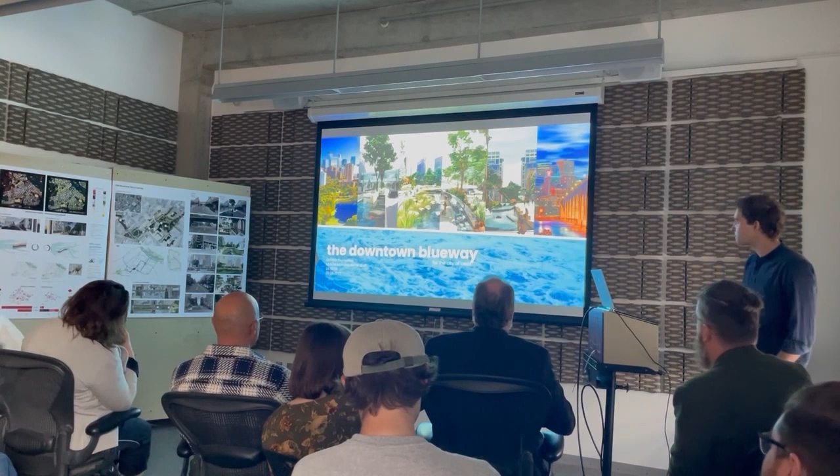I'm happy to close up the day, hopefully keep the energy up after 2 days straight of presentations. My project is called the Downtown Blueway, a master plan for downtown Minneapolis, with the city of Minneapolis as the main client here.

It's proposing a transformation from dead parking to dense urban habitat over the next 30 years. The why is because between post-COVID work patterns, autonomous transportation, and climate change, downtown must transform from a 20th century planning paradigm to one suited for the 21st and beyond.

The strategy I'm employing is to target the worst half of parking for redevelopment, reprioritize pedestrian, cyclist, public transit, and autonomous ridership as the preferred way to get downtown and move downtown. Connect the Grand Rounds through downtown to attract pedestrian-oriented development, and manage water joyfully and responsibly.

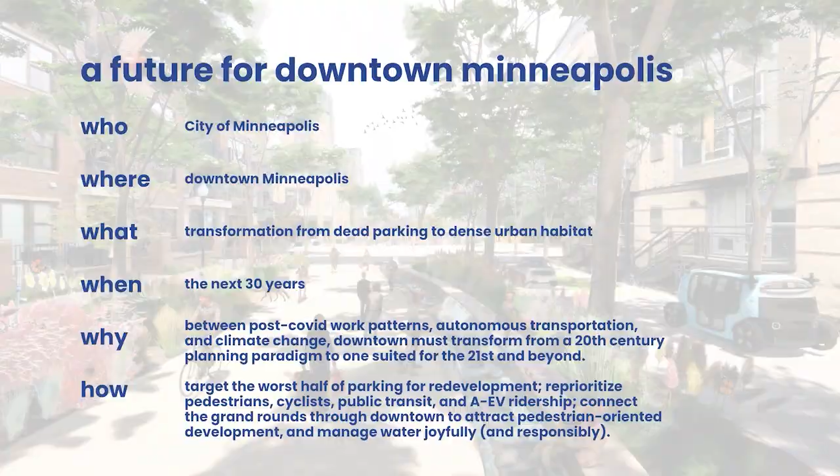Downtown has transformed several times in the past 200 years, going from a powerful place of gathering for the Dakota people, to flour mills and sawmills, an industrial landscape with streetcar lines, then spreading out to sprawl over the city, replaced by shopping and the car, and now offices, which are in crisis.

Just recently, housing has been increasing, and on the horizon we have a new form of transportation that will transform our relationship with parking.

This reiterates the landscape we generated in conjunction with the car. For about 100 years, we did everything we could to make parking as cheap and available as possible everywhere in the city. Despite this strategy, office spaces are now 30% vacant, and the rest remaining are 74% hybrid. We have 50% of the commuters coming into downtown compared to what this was designed for. When business is not in operation, much of downtown is just dead, vacant space.

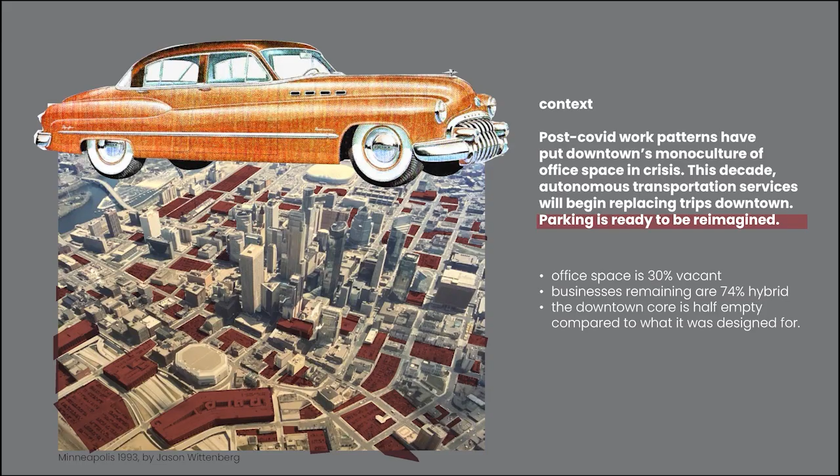This is not the landscape that will come along with autonomous vehicles. I'll get into this in more detail later, but the driving purpose of this project is to reimagine what we can do with this parking space to create vibrant habitat for 21st century life, addressing the challenges of climate adaptation, the housing crisis, and water stewardship.

There's a lesson we can learn from 1883, when the city was first expanding into what's now the rest of Minneapolis. The same year the streetcars were being laid, powered by water, Horace Cleveland urged the city to think 100 years into the future and secure the water bodies around Minneapolis as public land, so it wouldn't just be aimlessly taken up by private development and become someone's backyards.

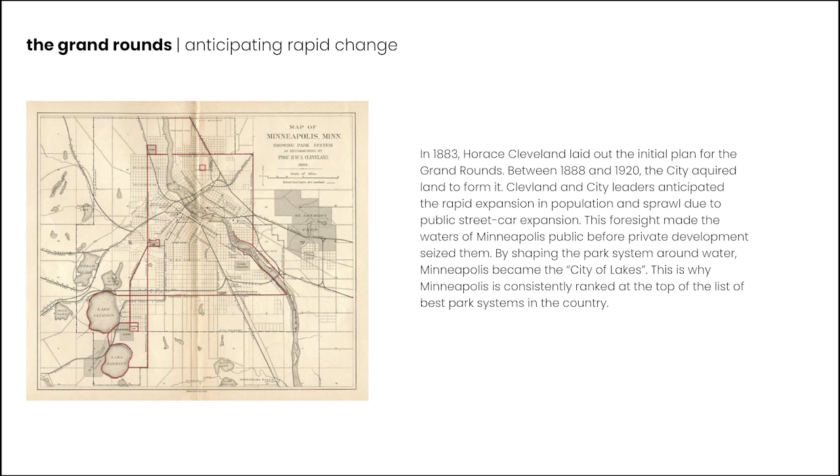This created the foundation of the Grand Rounds, which is very much at the heart of the identity of Minneapolis. We are a city that lives very closely with water, celebrates water, bikes around water, gets on the water, enjoys the water. Much of our recreation is focused on water.

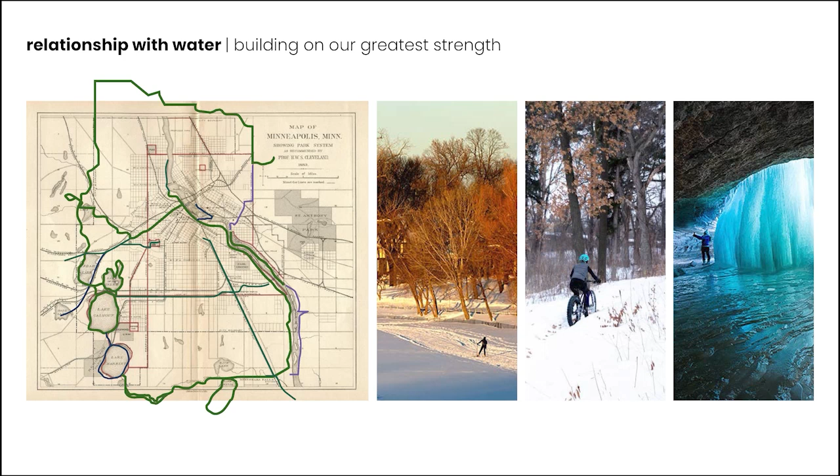This is also true in the winter. You can see people cross-country skiing and fat tire biking on the Grand Rounds year-round. This is really about half the year. It looks like this.

Part of this project is to expand on the best idea we ever had and bring the infrastructure of the Grand Rounds deeper into downtown.

So anyone who lives downtown has the entire regional park system at their doorstep, as well as people coming in from elsewhere in the city. They have a clear way to move on a bike or a scooter or on foot into the heart of downtown, so they don't have to navigate just a bunch of highways full of cars and parking.

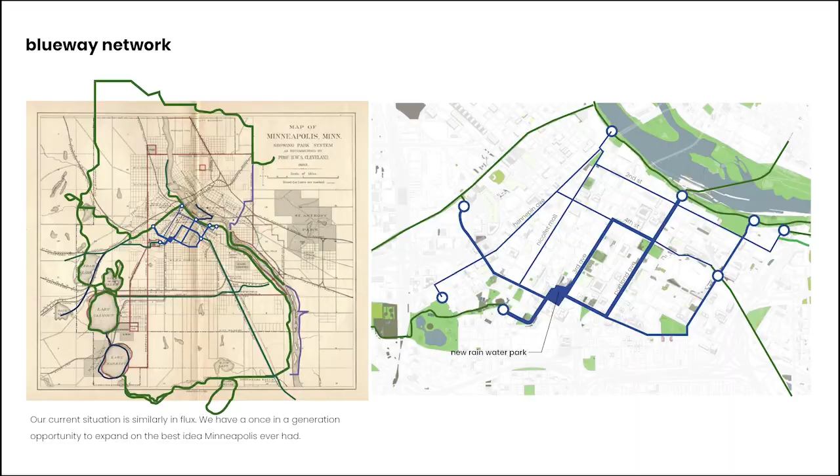On the downtown scale, this is going to link our existing parks, starting from Loring Park, through the Loring Greenway, Convention Center Plaza, Government Plaza, the Commons, and then up right to the Falls and the Stone Arch Bridge. This is the route that later in the presentation I'll walk you through.

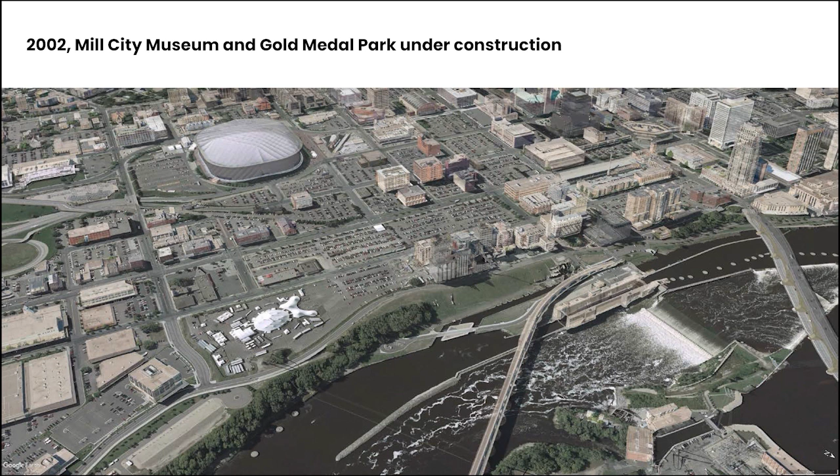The city has recently been moving from parking towards housing. This is just 20 years ago. The riverfront, right by the falls, you would think would be one of the most desirable places to live, was a post-industrial parking wasteland. You can see them beginning to build Gold Medal Park here, and the city signaled an investment in this space.

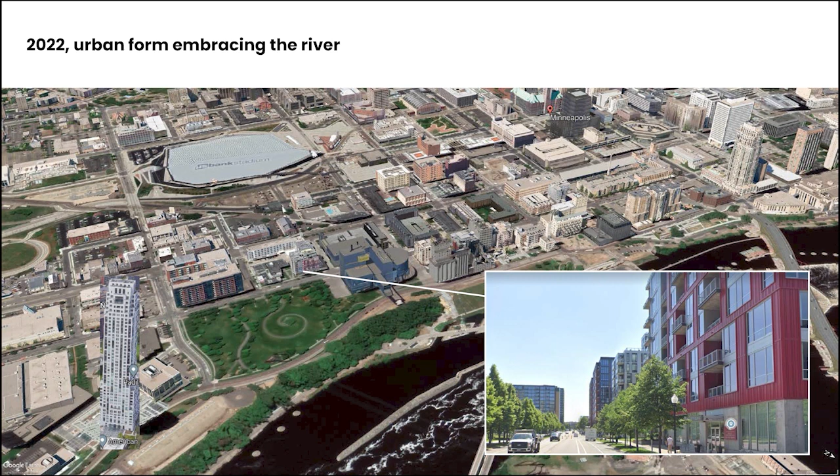20 years later, we have 2 blocks worth of fairly dense housing that is changing the entire meaning of downtown, and it's already becoming a place where people are living. My project is hopefully going to bring some of this energy and the connection to water deeper into downtown, which, as you'll see, is a parking wasteland.

The strategy here is to target the 50% of parking that is the easiest to transform and the most harmful to urban life. If we reduce parking by 50%, we can free up 85% of the surface area of parking, or 19% of downtown. I'll get into that in more detail later.

With that space, we could almost quadruple the housing downtown and become as dense as some of the most livable cities in the world, with 18-hour street activation, plus hopefully 18-hour activation of the Skyway.

Decoupled from parking, housing can be 20% less expensive than it otherwise would be, and we can combat rising housing costs throughout the region by building more dense housing here.

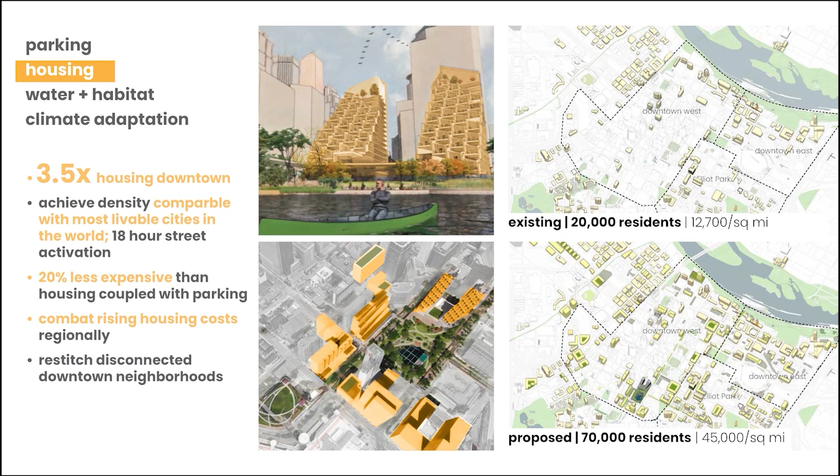This system is going to manage water much more responsibly and joyfully than we do now. Currently, we just pollute the river with water polluted by cars and everything associated with them. This will get 63% more green and blue space and 3 times more water infiltrated and evapotranspirated than we do today, and eliminate the worst of the pollution to the river.

We can also adapt to climate change in two critical ways: one is creating more density downtown so that we're reducing sprawl, and creating power generation—basically emissions reduction. The other is being aware that Minneapolis is a place where people from more vulnerable places are going to want to move to as climate change creates more fires and flooding elsewhere.

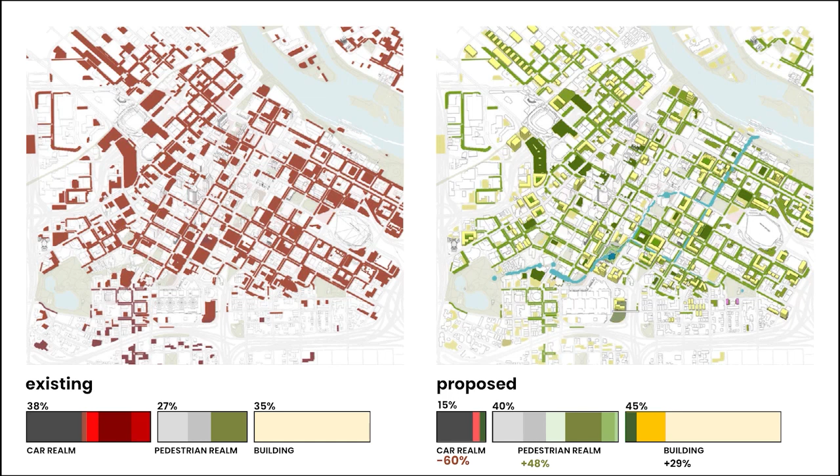All in all, this is going to transform about 27% of the surface area of downtown from one that only touches parking, to one that has 29% more space for buildings, 48% more space for green space, and just the general pedestrian public realm. I'm going to get into more detail here.

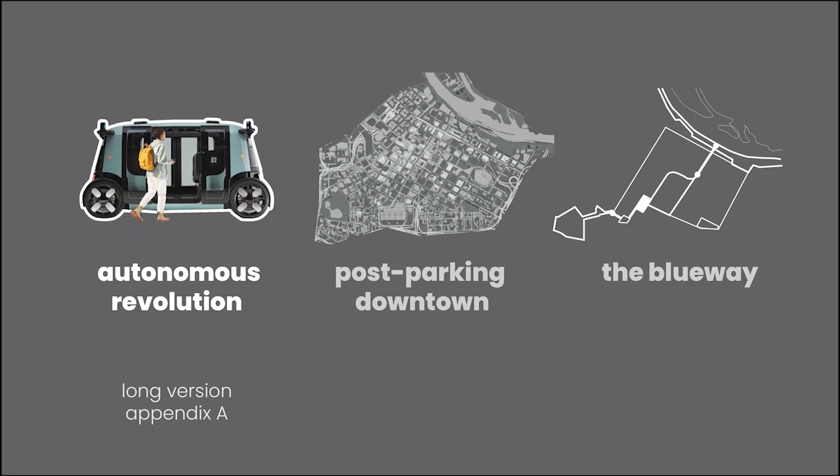I do want to talk about the car thing, because this was the kind of research that spawned this whole project, even though it's grown beyond that.

Just to reflect for a moment: in 1904, no one saw the car coming, really. I mean, the New York Times thought it was going to be just like a fad for rich people. And 15 years later, it had roughly taken over the country and began transforming every American city, and certainly ripping apart downtowns.

And we're at this moment here with autonomous transportation, and I know there are a lot of skeptics about it, but I'm hopefully can at least convince you that we should consider it seriously, even if it's still uncertain.

So after the introduction of the car, we transformed our city to produce as much parking as we possibly could, thinking that would be the solution to modern life and modern living. And of course, what it created was a lot of dead space, and not a pedestrian texture of life.

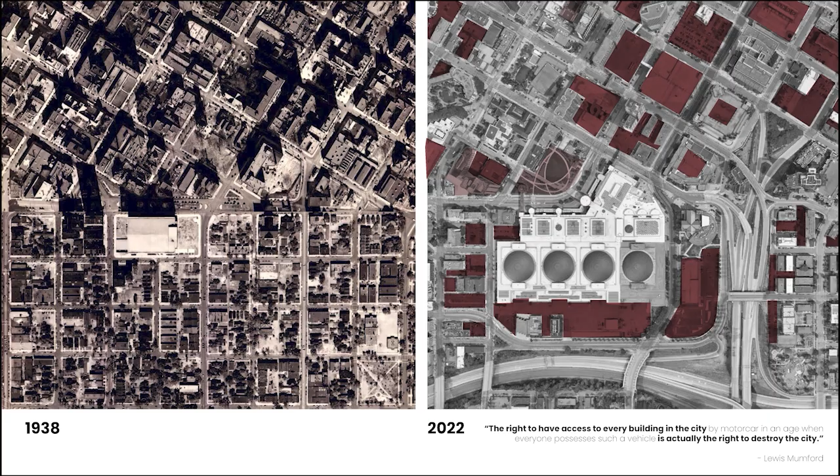Much of downtown looks like this today: blank walls, blank parking, very wide streets for cars, and then of course cars parked all in the street. There's very little street life because downtown is about as dense as a single-family housing neighborhood. There's not much to do on the street, largely because it's all just parking.

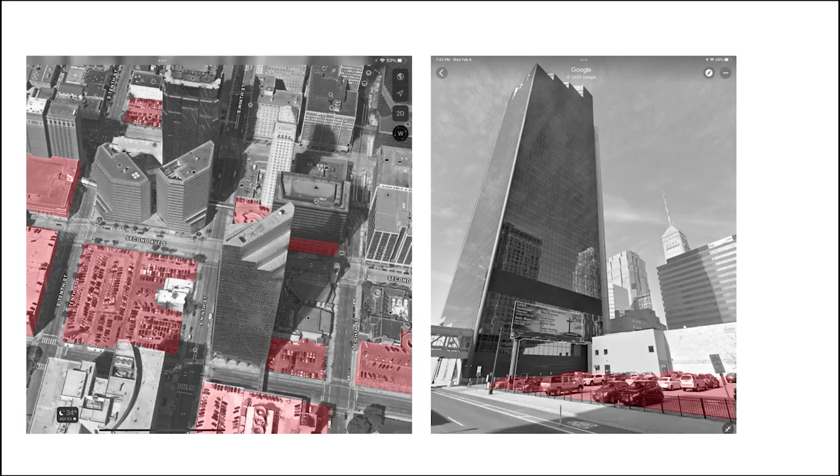Even our skyscrapers just sit on top of little surface parking lots. And again, parking. So we began to turn the corner on this in 2009.

We ended downtown minimum parking requirements. In 2021, that went citywide. So we've finally learned the lesson that this is not the solution to urban space.

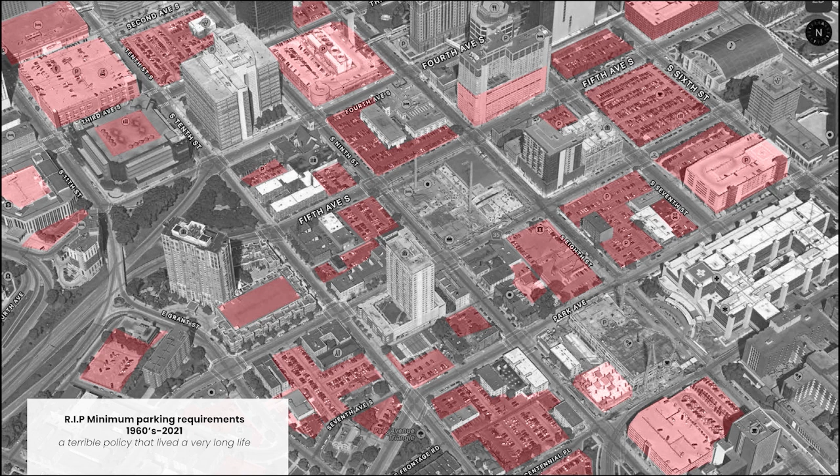Hopefully we can go in the other direction and begin actively encouraging people to use other modes of transportation other than driving and parking their own car.

The stakes are very high on this, because sprawl generated by this type of development and this approach to downtown development constitutes a large part of our GHG emissions. Transportation is about 40% of our emissions, and this is the type of development that produces that.

We have a climate crisis that obviously is ramping up year after year, and a lot more people are going to be moving here from more vulnerable places, and I include myself in that category. I would probably be living in New Orleans after this semester were it not for the flooding that's increasing there.

Parking has also made housing more expensive by bundling it in, and made all sorts of housing types in the middle sort of unbuildable based on our zoning. So we need a new paradigm, and like I've already reiterated, dense, verdant urban life is the goal.

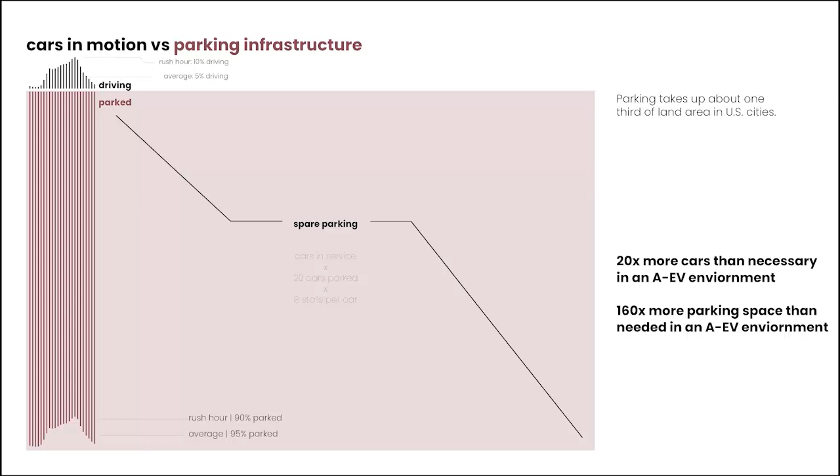Cars are used 10% during rush hour and 90% parked, most of the time 95% parked. Here's the spare parking that is empty at any given time, and a diagram of the same thing. For every car that's actually on the road, there are 160 parking stalls with 19 parked cars in them.

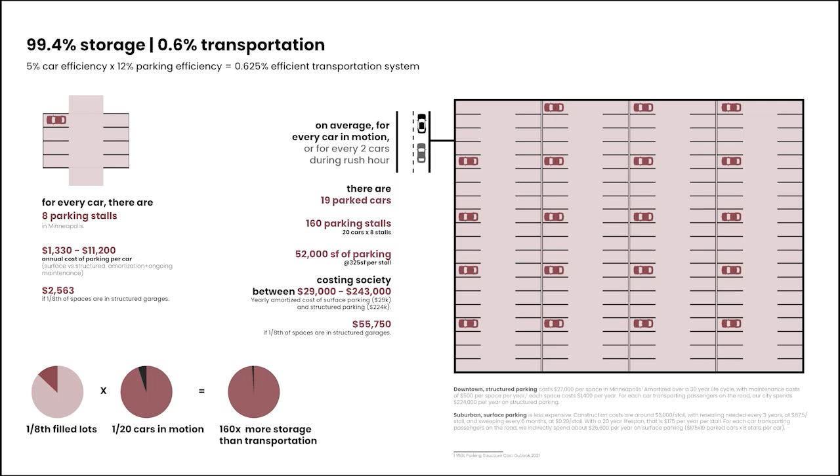If 1 out of 8 parking lots is a structured parking garage, that would be $55,000 a year in yearly cost to maintain that infrastructure, which we all pay for, mostly indirectly. Car owners spend about $10,000 a year to own a car, and an additional $4,000 to $5,000 in parking costs, which are mostly just built into everything else we spend money on, except when you pay for parking in a garage.

So 24% of our spending goes to this, and I don't think anybody feels like their transportation constitutes 24% of their value in life, or the things that they value.

This is why I'm very optimistic and excited about autonomous transportation. You can watch this video, it's about an hour long, and it will help explain why this is the likely cost of future transportation in an autonomous context.

This assumes that people are not owning these cars, but essentially you can imagine an autonomous Uber, or more likely a subscription-based service that wraps around transportation needs. There are more cars already picking up people today than Uber was in 2010.

So this is happening right now. Obviously there's still beta testing, and they're getting better every year. This could be available here in the next 5 to 10 years.

The likely economic model is what we've seen before. Everything else in the digital revolution is going from a personal copies and storage model of consumption to one that is about streaming and using resources efficiently. So long story short, $1 per mile versus 20 cents a mile.

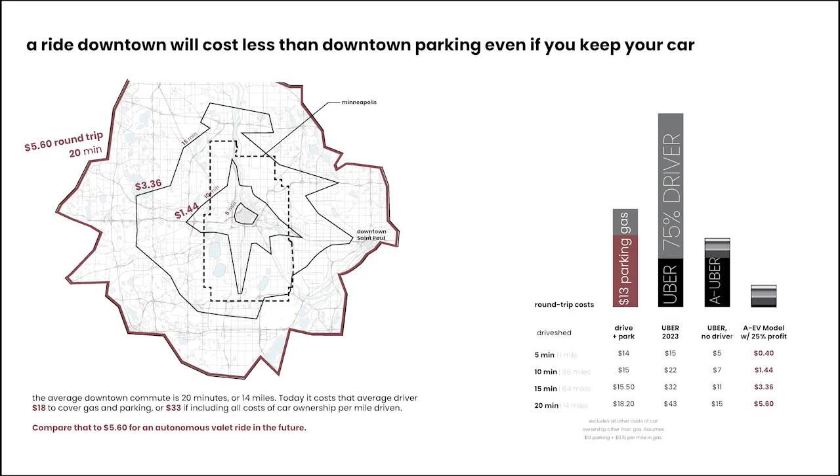In this context, when it's this cheap to get downtown without parking your car, I don't think there's any more reason the city would subsidize parking and provide this much parking downtown. This should be a private sector thing. If you want to drive and park a car, you can do that on the free market. It's not in the city's interest to provide this, certainly not at a discount.

So this is all the public parking we have today. And the question is, how can we use all this space better?

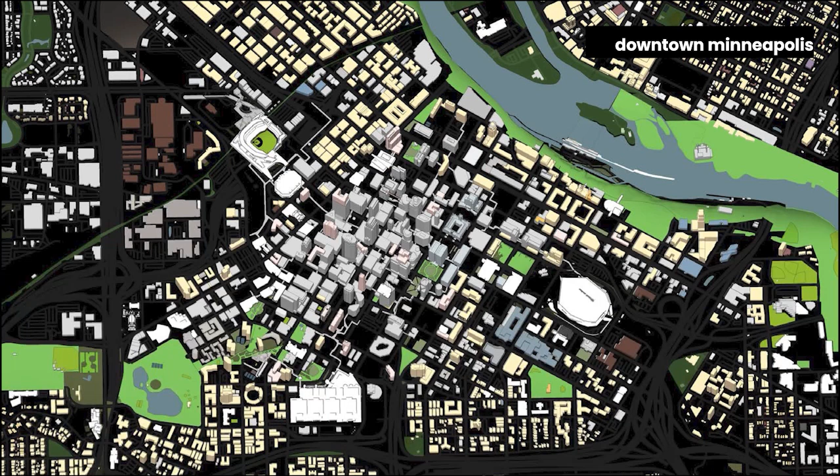In the post-parking downtown, let me orient you to our city. Here are our park systems, our parks, and here's the business core, which is 30% vacant, 74% hybrid. It's at 50% capacity, and all these businesses are in crisis right now.

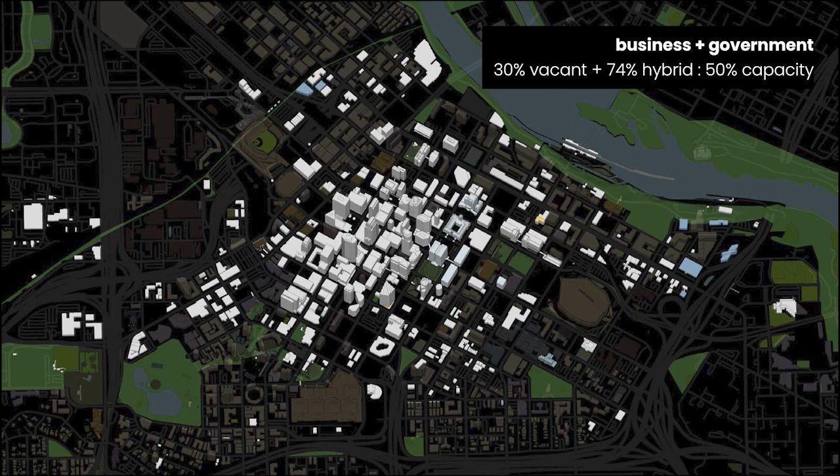Certainly the building owners as well—hotels, and then residential. These neighborhoods are fairly fragmented. If you take this area in total, it's ultimately like a single family residential density.

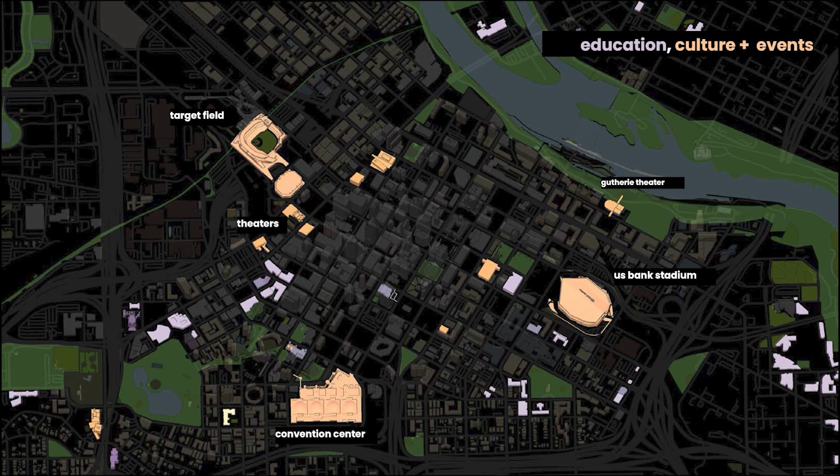We do have some great things downtown: colleges, cultural and event centers, theaters, etc. Now putting everything together, what you see in black is car space, and then turning on parking, you can see that as well.

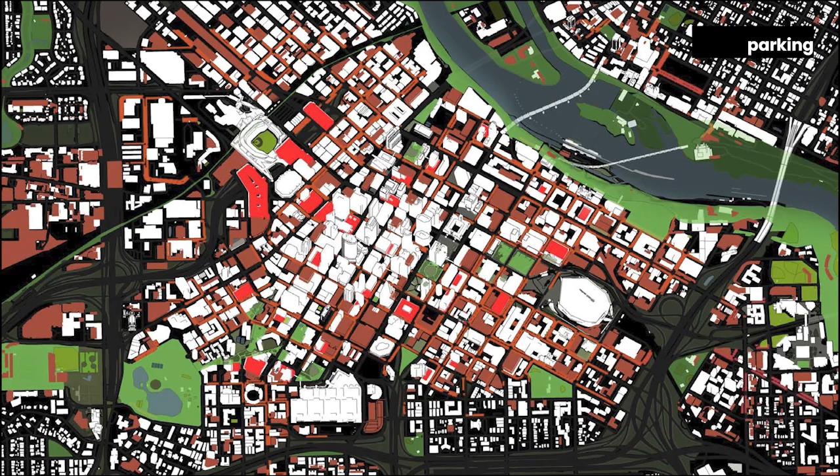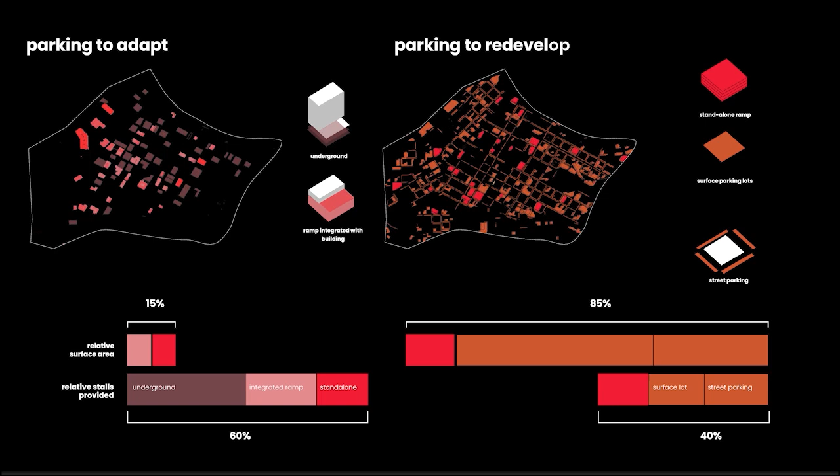The strategy here is to keep the underground parking and the ramps that are integrated into buildings—these are facilities that aren't going anywhere anyway. That constitutes 60% of our parking stalls but only takes up 15% of our surface area. For the rest, I'm proposing we rethink what it is and make it not parking in the future.

All parking is 21% of downtown surface area. There are our ramps, which we keep connected into the Skyway system. We can green the roofs and power transportation with solar.

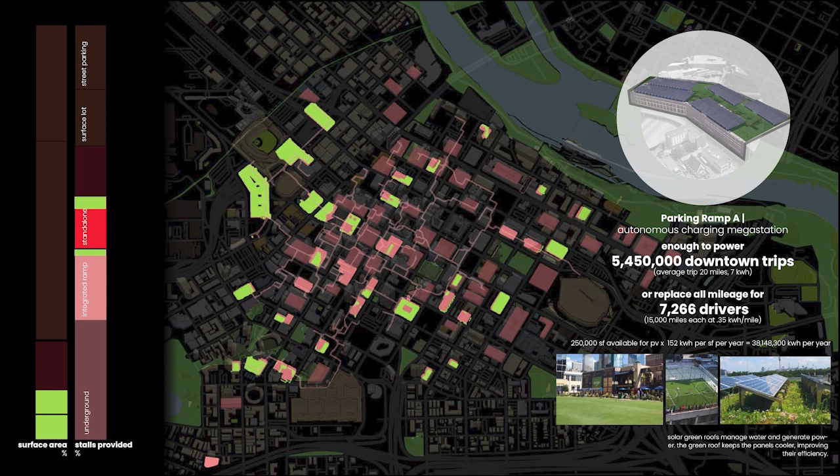This ramp alone could power 5.5 million trips downtown, or replace all the miles for 7,000 drivers. We can also use the space for recreation, and green roofs for managing water.

And in this section, the Skyway system could become the place where you still essentially have a pickup drop-off lobby for these cars, which would wait 15 minutes. As you leave work and approach, they come down and whisk you off—you can get out of this faster than you do today.

And this 50,000 parking stalls here could power 6 times as many trips as the 100,000 we have today.

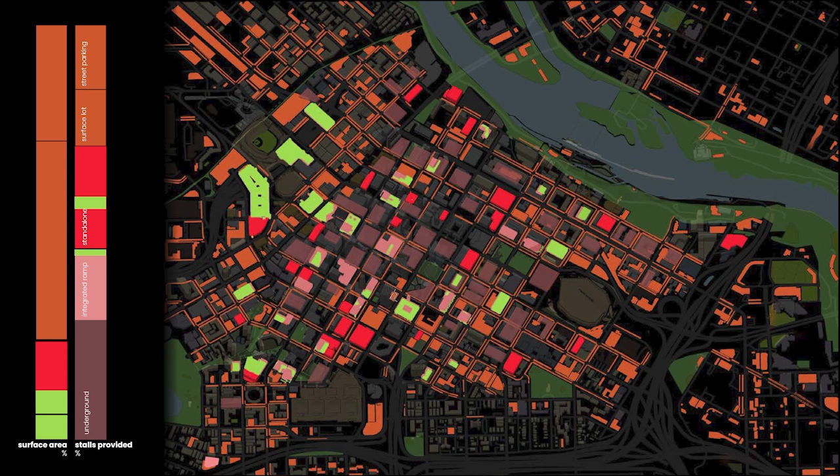Here's the rest of the parking again. Fairly simple—I'm proposing we give street parking back to the public realm. I believe that 50 years from now, we will look back at pictures of our streets today littered with people's private property.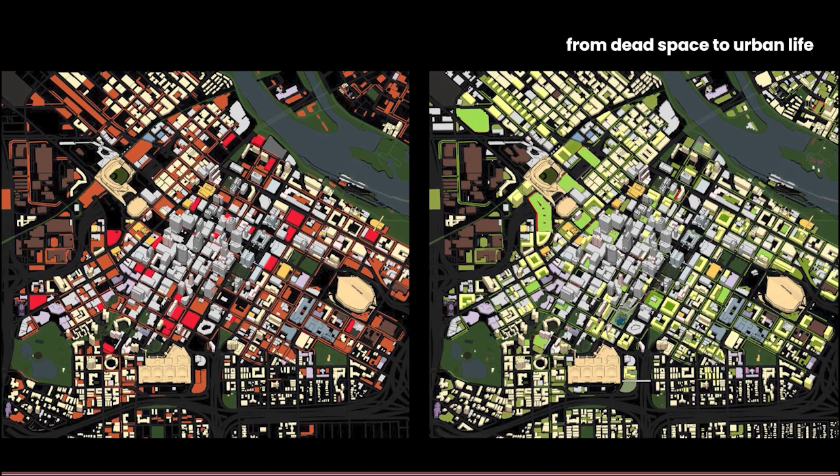The rest—surface parking lots and structured parking—I'm proposing becomes mostly housing and green space. So here's the restitched city core compared to the existing, and here's the total changes.

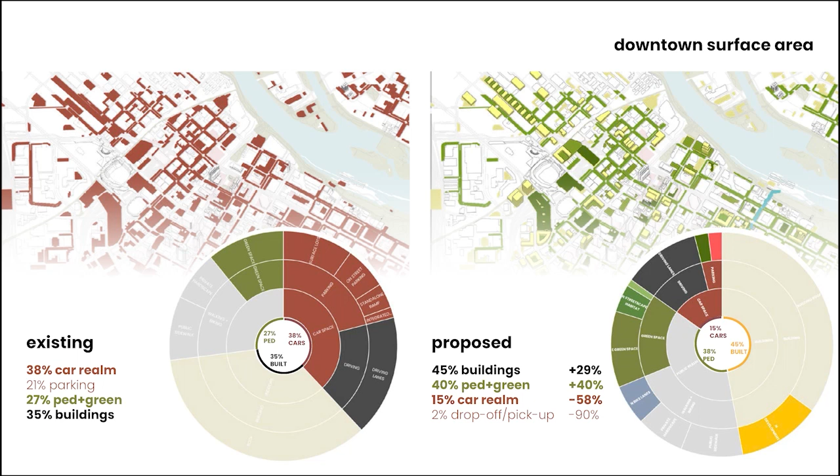Going from 38% of the space for cars down to 15, and 21% of parking down to 2%, with more space for green space and buildings for housing. Just to get a sense of what's changing to what.

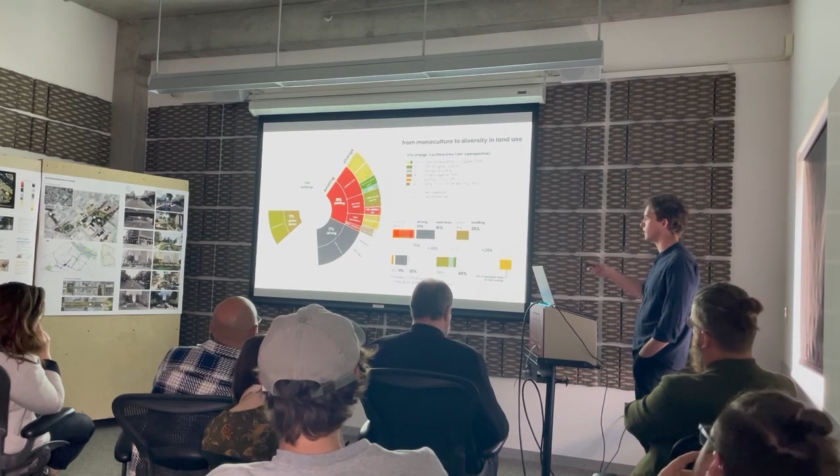I want to talk about housing for a second. How much housing could you get out of 10% of downtown? At 6 levels of housing, that would get us 2.5 times the current density, bringing us from a single-family residential density to Philadelphia city center or the Chicago Loop. If we were an average of 10 stories, that gets us comparable to Toronto, and in shooting distance of some of the cities consistently listed as the most livable places on earth. So it's not that much.

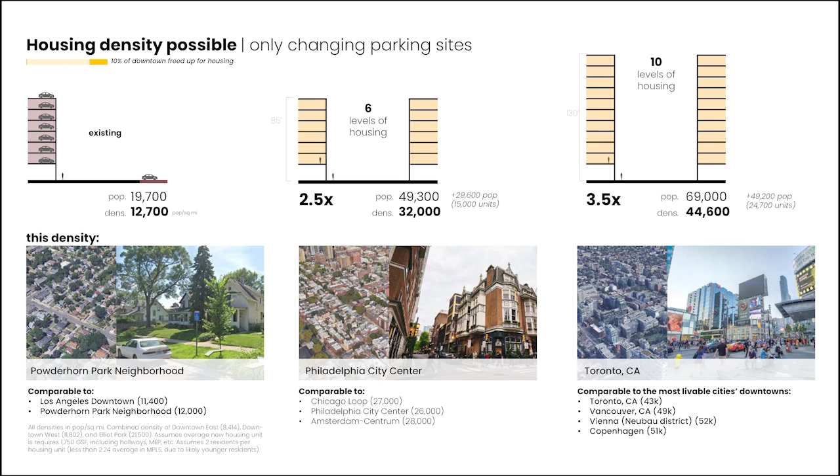10 levels of housing is not skyscrapers. If we're smart about how we zone for form, we can ensure taller buildings are on the south side of the block, shorter buildings on the north side, so we don't overshade our streets, because we're a very cold place and it sucks to walk around in the shade in the winter.

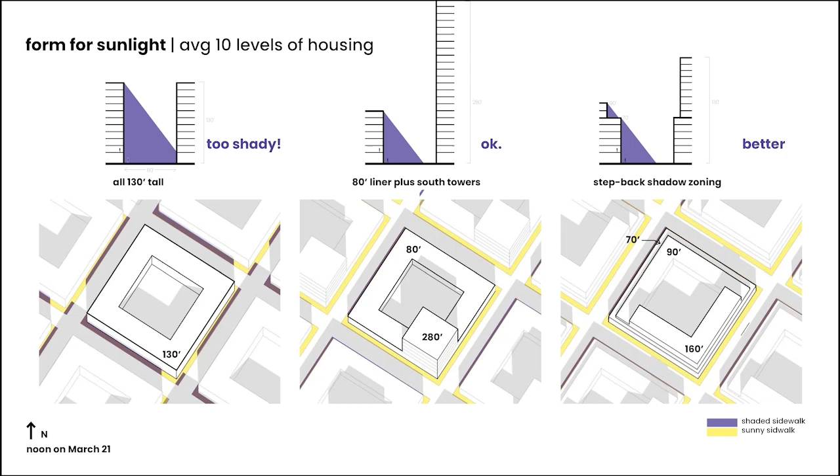In our street design, we can bias the sunny side of the street for more people and more plants. We're putting the car space on the south side of the street in the shade, so there's always a beautiful way to move through space in the sun for half the year when it's extremely cold.

A typical street section going from something like this, essentially a highway down the middle with a dangerous bike lane that usually has a car in it or snow in it, becomes a place that's more for people and plants and dense vegetation.

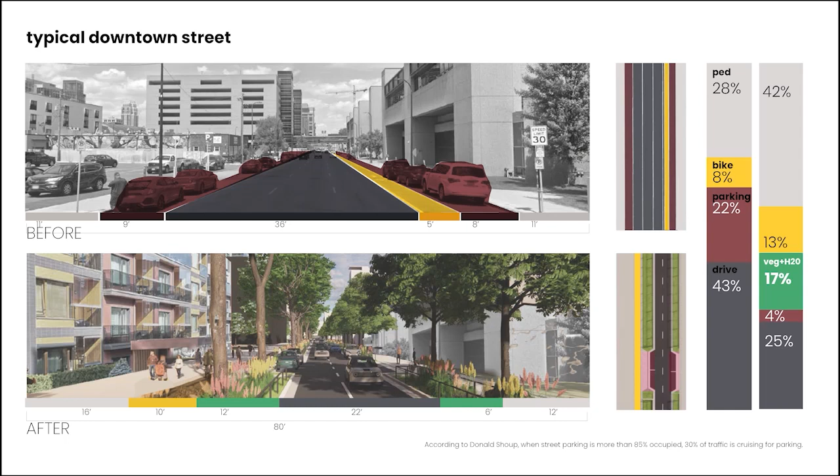A better view here to get a sense of the street section. This would be like a typical downtown street. We'd finally have a place to manage snow. Currently, we just throw it wherever on the sidewalk and into the bike lane. In springtime, when it's melting, it moves through shared tree trenches.

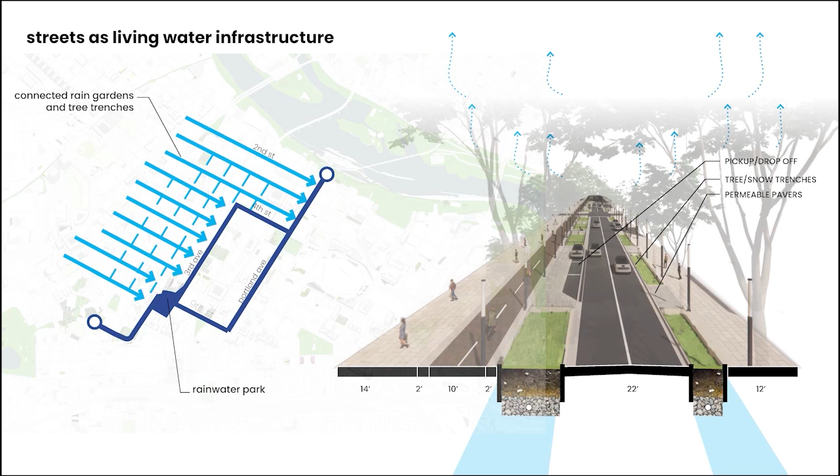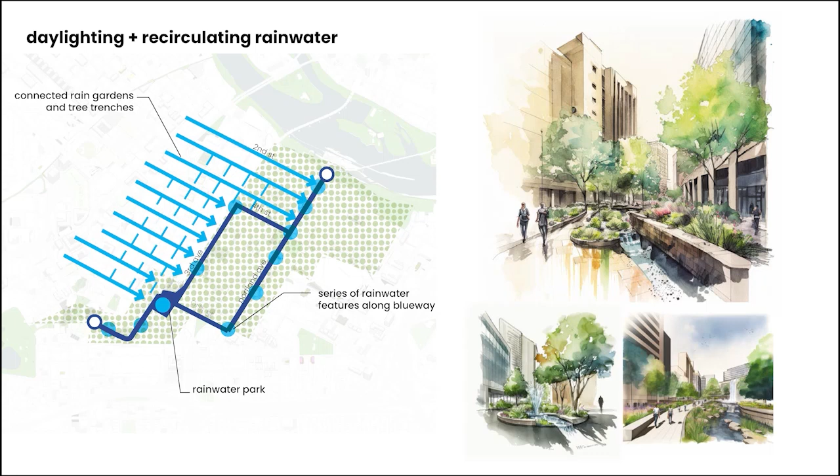That will ultimately make their way to the Blueway, where it'll be daylit. Of course, there's salt to contend with, so we need plants that can deal with salt and shade. Where that water hits the Blueway armature, I'm proposing we bring it up and daylight it, enjoy it, evapotranspirate it, as well as clean it and oxygenate it. All in all, this is going to go from 81% runoff, which is mostly polluted car space, to mostly transpiration and infiltration, with runoff really just from roofs, which is fairly clean water.

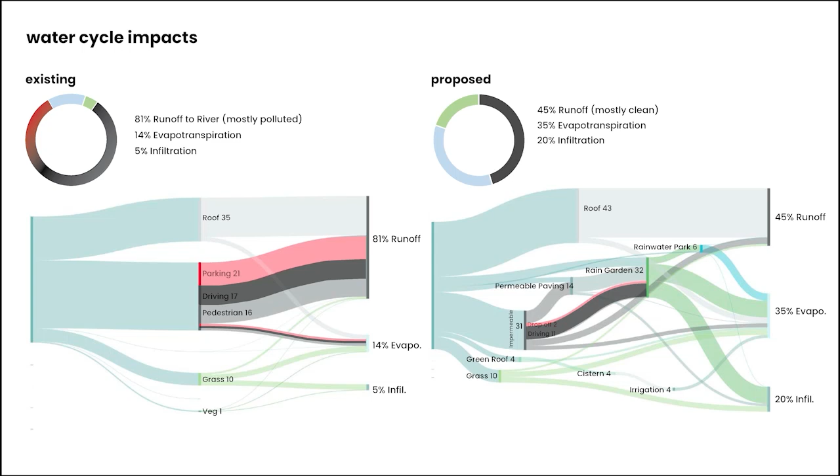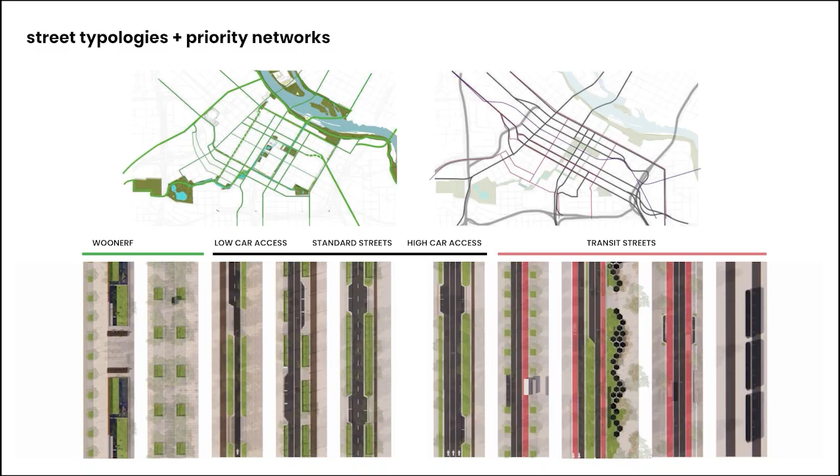I'm going to skip over this, but we'll need to take some care, learning from the Dutch about how they separate transit. Some streets will be more oriented towards public transit or the car, others more oriented towards pedestrians and bikes, and these overlapping networks will work together to create better spaces for all users.

All right, part 3. I'm just going to walk through the Blueway. So it's been a lot of left brain stuff - now we're just going to enjoy some visuals.

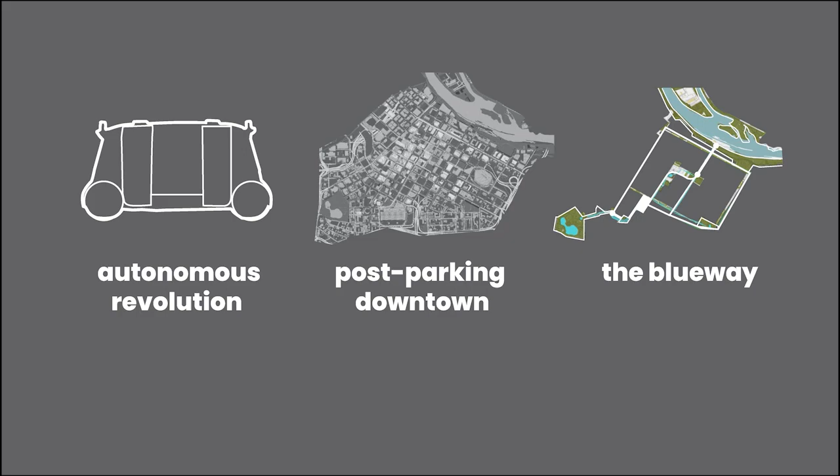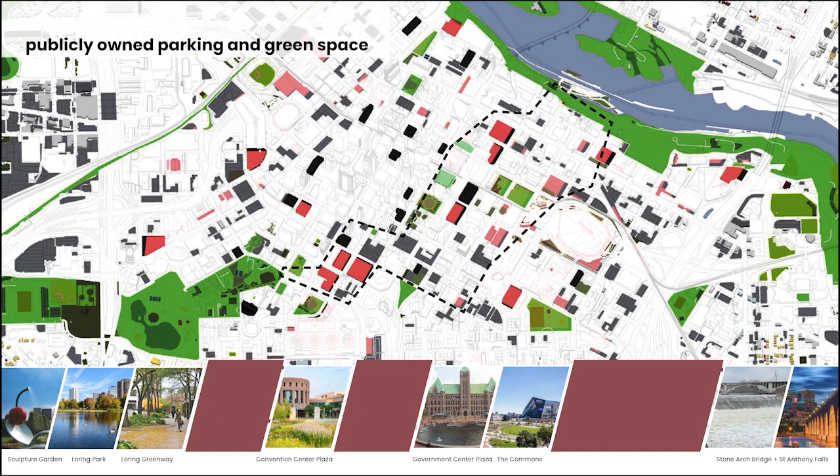The idea here is we're going to use this girdle of parking currently surrounding the downtown core, and carve a new way to move through the park system, because all this parking lot is disrupting the rhythm of our existing parks. Moving from Loring Park, I'll walk through this sequence: from Loring Park through the Greenway to the Commons, to a new rainwater park, and then up Portland Avenue to the Falls.

This is Loring Park. It's a beautiful park, surrounded by dense housing that is old and beautiful, as well as some new towers.

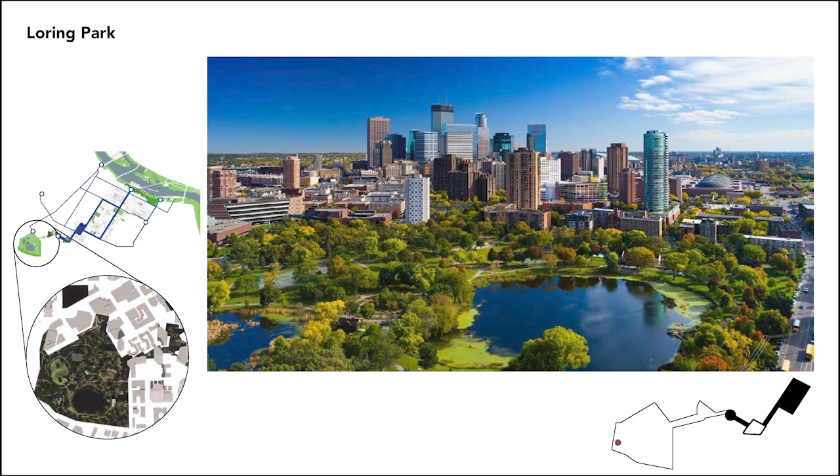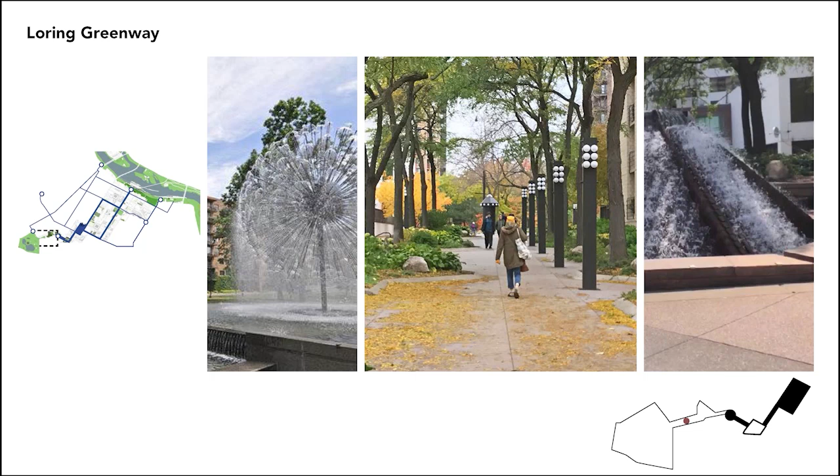This is the Loring Greenway, built in '75. A beautiful space, only bikes and pedestrians, that connects the park to Nicollet Ave. It uses water as a feature along the whole thing to activate the space and give you a sense of place and connection to Loring Lake.

Currently it dumps you off at Nicollet Avenue Mall, which is supposed to be kind of a pedestrian street, but it's really a bus terminal.

I'm proposing we use this other new park that was recently finished. We connect to that and then connect up into downtown through what's now this parking cluster, one of the worst places in the city, in my opinion.

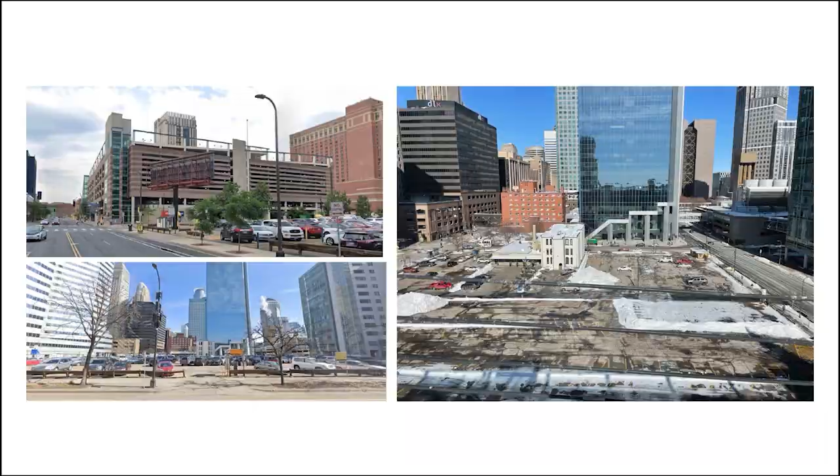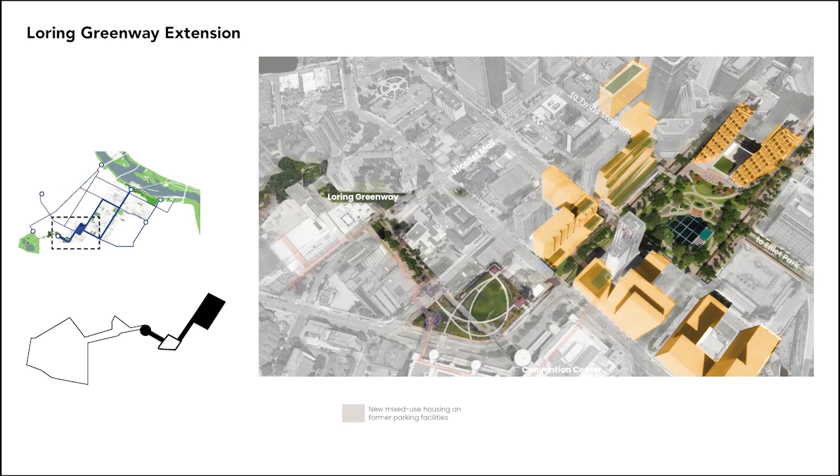Before and after - this is the walk through that first entry, the entry from the Loring Greenway. This is it today.

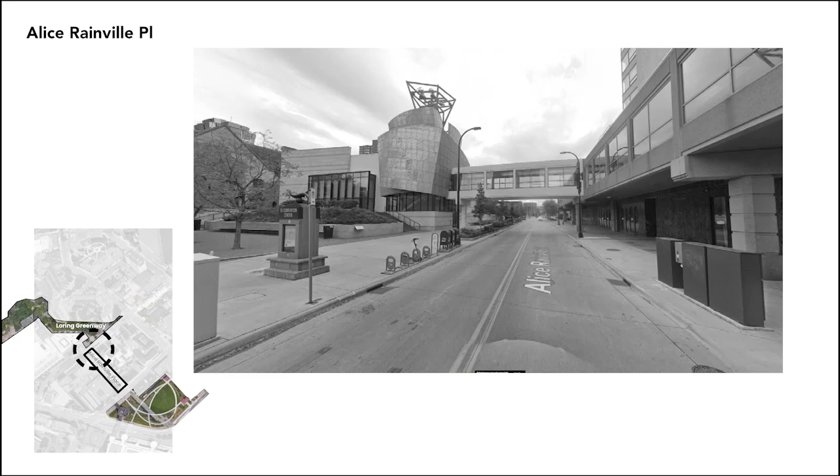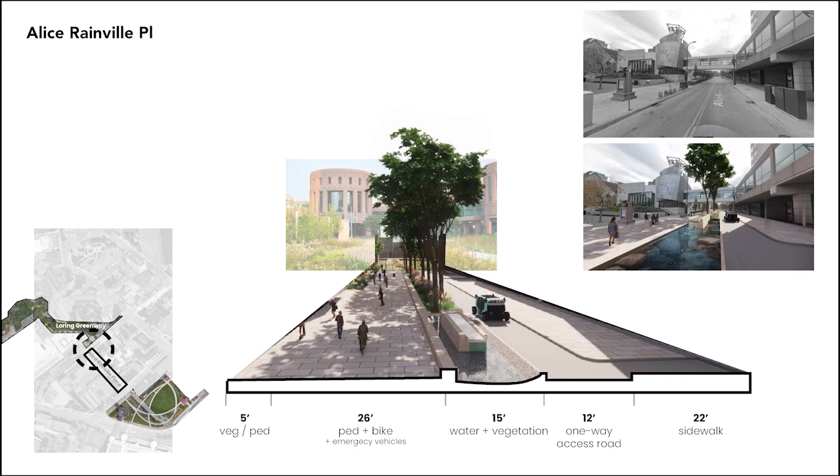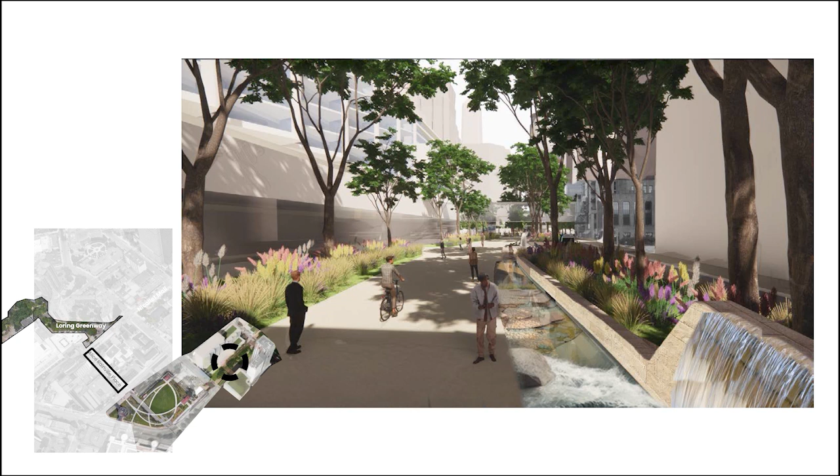I'm proposing something more like this, with just one lane of traffic for accessing these buildings and then a much wider space for pedestrians and bikes on the left, with a large space for water and vegetation running down the middle. Then you hit the convention center park, and what's currently highway parking would become something more like this, with housing on either side, stepped back to give some more space. And then you'd approach into the park, which would feel something like this. This is the existing garage structure, just preserved and turned into an urban waterfall, and this whole thing would recirculate water and clean it.

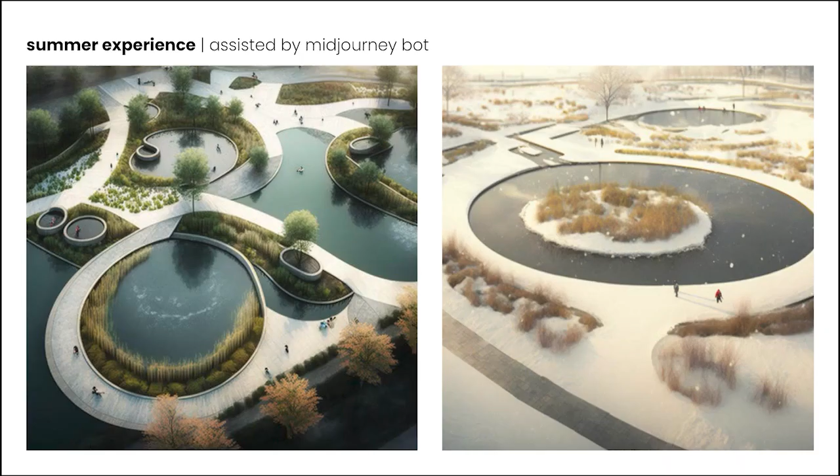I use a lot of AI for making some of these. This gives some sense of atmosphere for summer and winter, inspiration for what this might feel like in winter - ice skating on the lake, a frozen falls, like a mini Ha-Ha Falls that you could get to from your front door. At night you can imagine how this could be programmed with light, engaging with ice and water in its frozen form. Here's the plan for it.

Now, without needing to build new housing with parking, our building doesn't have to be determined by parking, so we can activate the street on either side and overlook the park. I'm proposing a connection to the Skyway system, so this would be a public space where you can finally enter the Skyway in a legible way, without going through some corporate building to get there. This space would mediate between the Skyway level and the street level, overlooking the park.

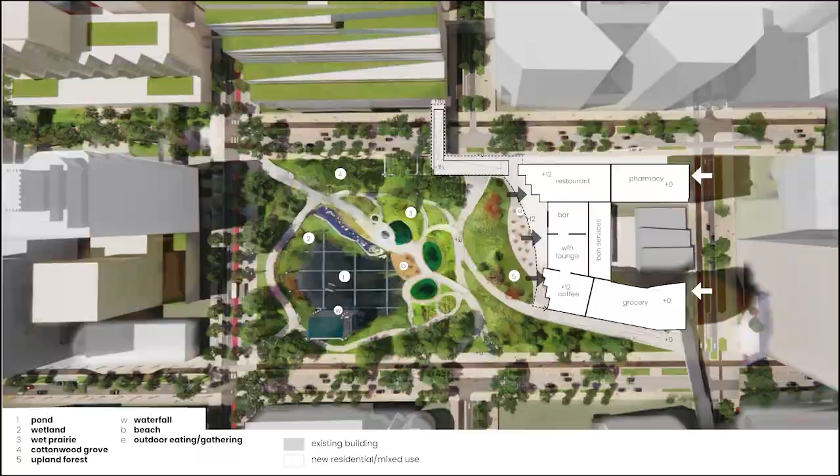I'll just skip this - you could do all sorts of stuff. If you're not paying for parking, that 20% that would otherwise go to that might go to saunas or pools, amenities, whatever people actually want in their lives besides storage. And of course, you have a nice view.

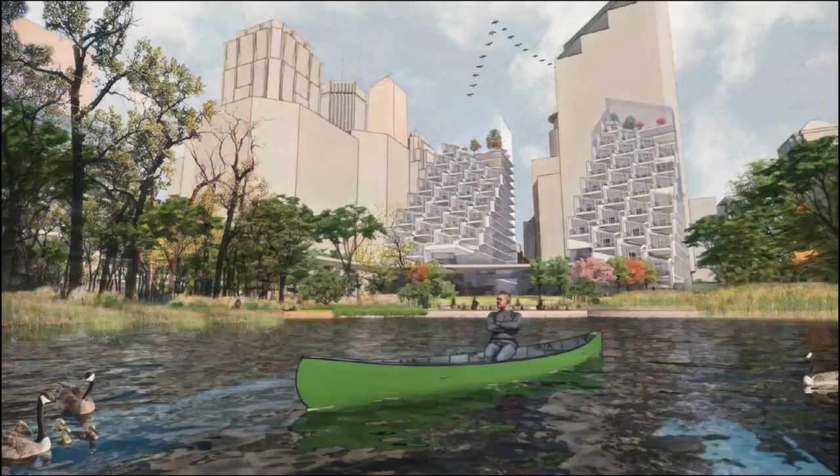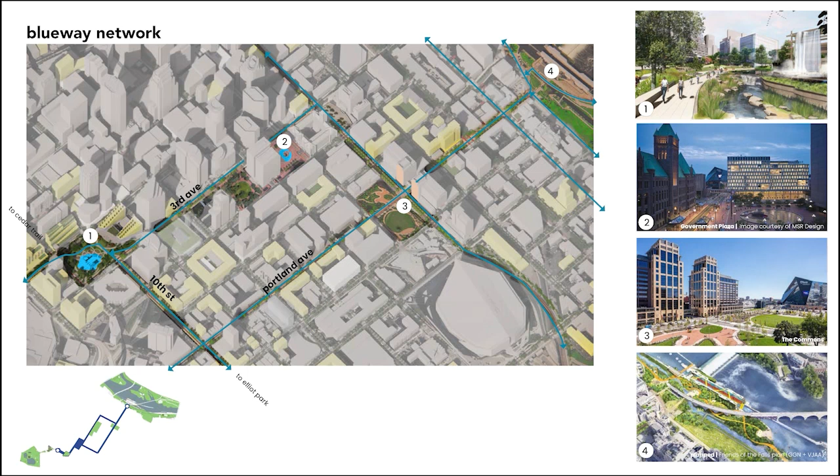Moving from this, you can see how this becomes a rhythm of these existing parks, moving to Government Plaza and then the Commons, or going up to Portland. At minimum, this connection would be on a very good street. If I had more time, I'd want to consider these more carefully, but I do want to talk about the Commons and the connection between here, the falls, and the river.

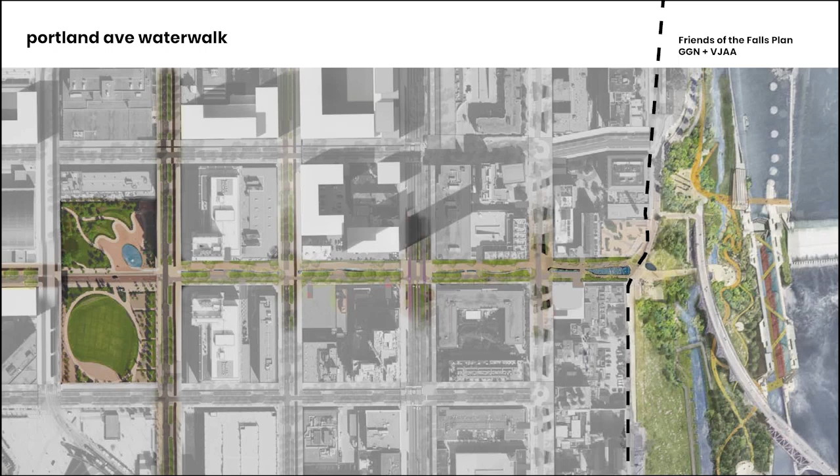Currently, this is what it is. You see the lock and dam, which is now closed. They're planning a re-envisioning of this whole area, which would be great if it happens, so my connection here would reinforce that.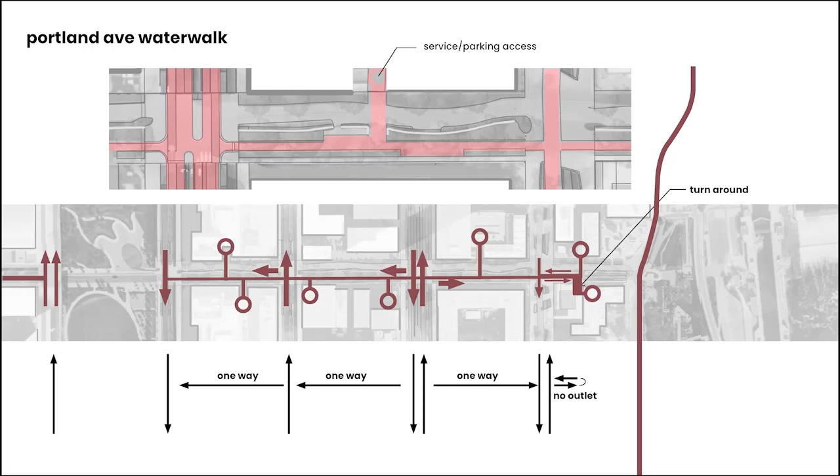It's similar to the streets before - I'm trying to minimize car use. In this case, disconnecting the road from the Grand Rounds Road here, so that as far as cars are concerned, this would be more of a service road or alley, keeping access to all these buildings but trying to minimize car use on the street, so that pedestrians and water have more space.

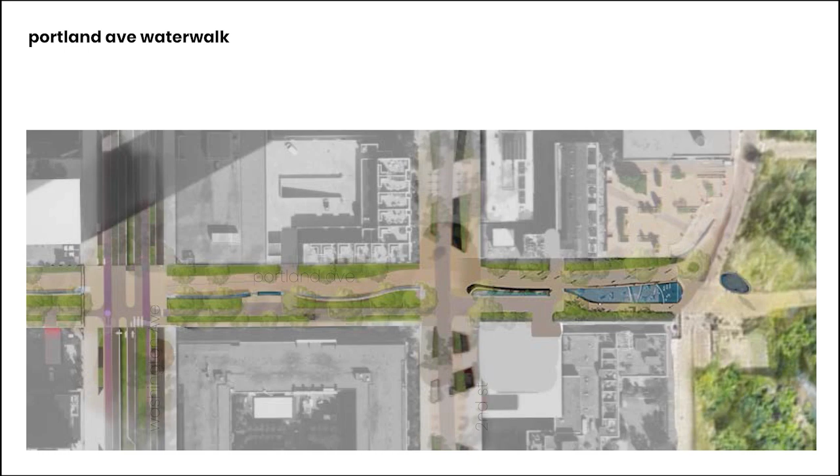So this is the final approach to the river - this is it today. I'm proposing, similar to the early ones, this kind of continuous water wall and space to get into any cars you might want, moving towards the river. At night we could light it up, hopefully better than this.

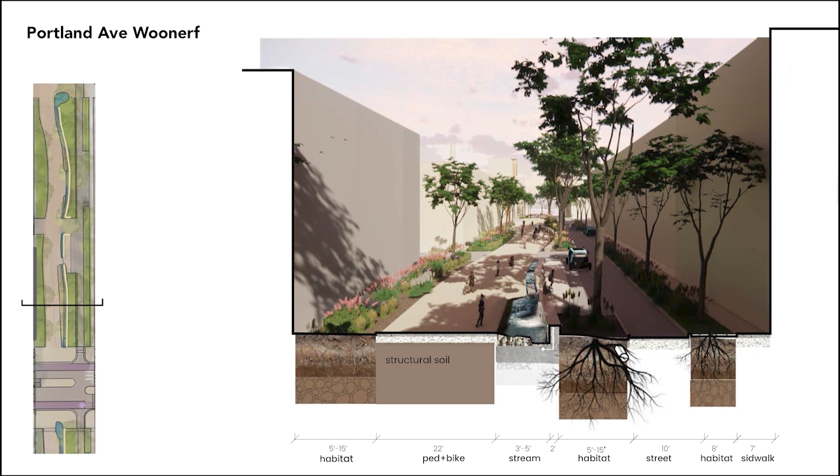Here's a section - you can see how this would become like a pickup zone, the shape of that wall becomes seating as you get picked up by a car. And we're trying to get as much soil in here for growing big trees as possible.

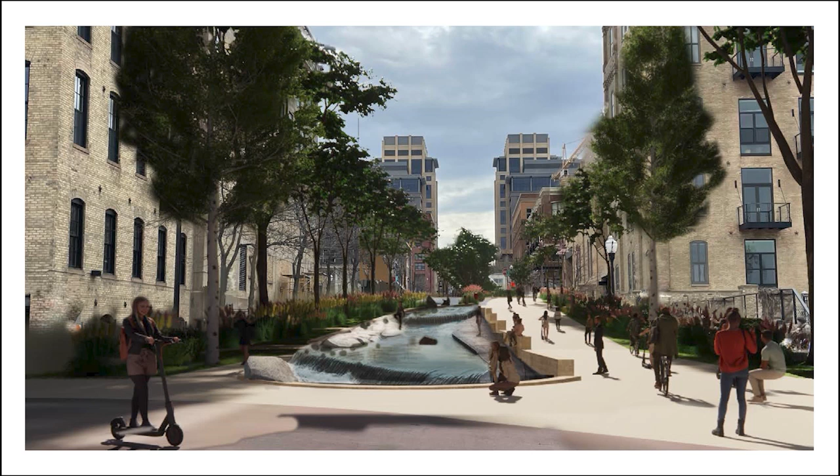This would become a real opportunity to cascade water and have a big moment of water where it opens up and greets you. The city greets you with a wet handshake. I never said that in practice - I don't know why it came out.

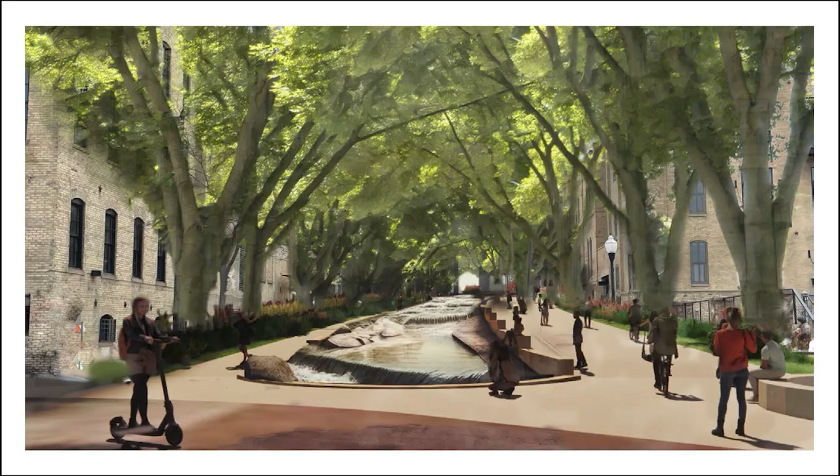And then eventually, hopefully, with 1,000 cubic feet of soil for all these trees, they could actually grow really big, unlike our street trees today, which die after 13 years. So that's the Blueway, the center of this armature, and perhaps phase one of this whole expansion of de-parking our city would be emphasizing this investment here.

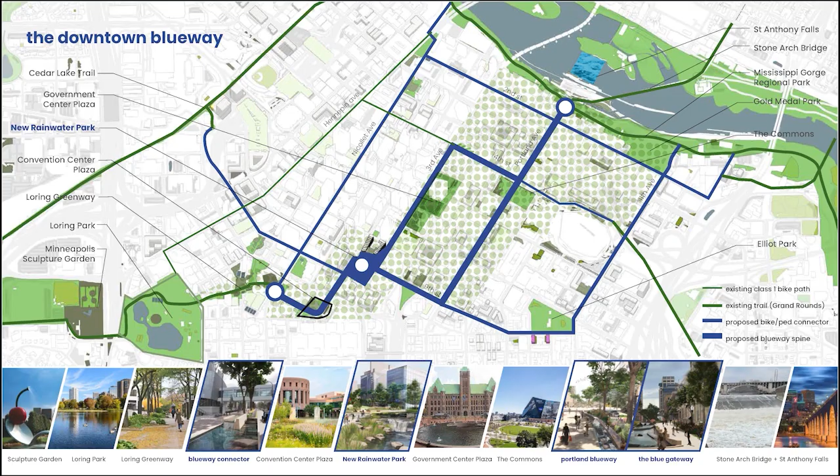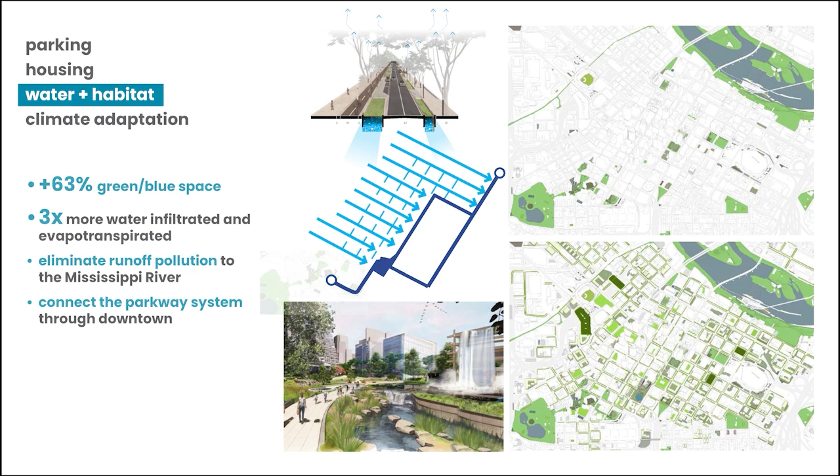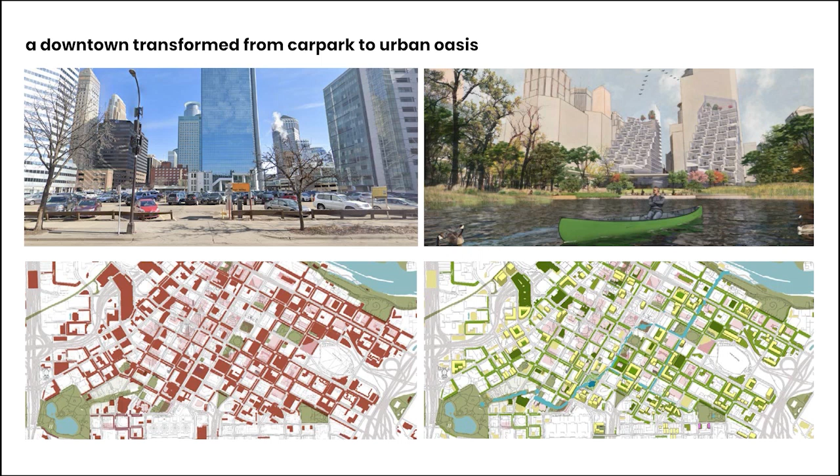In conclusion, a 50% reduction in parking gets us almost 4 times as much housing, more green space, green energy, a healthier water cycle, more green and blue space, eliminating runoff, and planning for climate migration to the city. The downtown would be transformed from a car park to an urban oasis. Thank you.